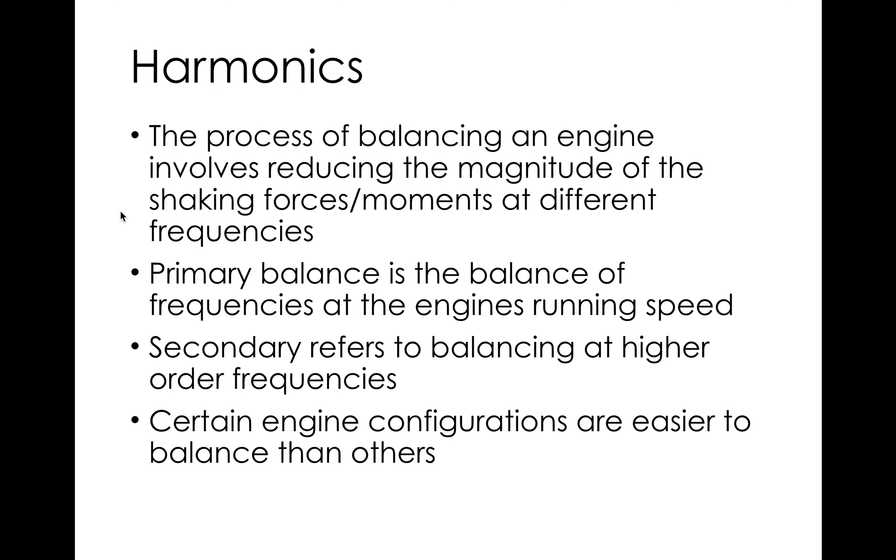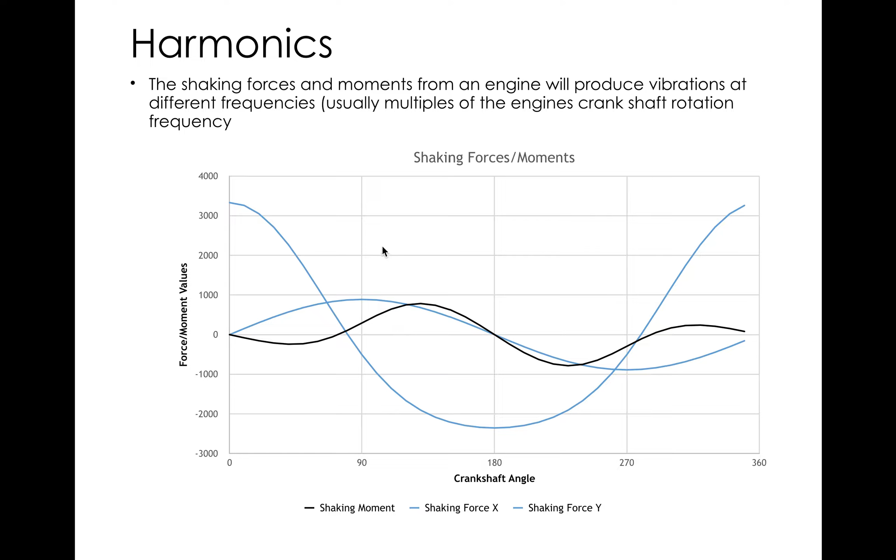Shaking forces, something we talked about previously, can be analyzed using the model we made for the internal combustion crank slider mechanism and force analysis to plot the XY force and the shaking moment. Last time we did the simplified model looking just at the acceleration of the piston. Here we're looking at the forces on the engine block and the moment on the engine block, and these are the forces that actually cause the shaking. We can do a fast Fourier transform to get the frequency domain information.

That's from the piston: as it moves up, it's pushing the engine down; as it moves down, it's pulling the engine up. It's a really strong vibration in the X direction at the frequency the crank is running at.

The Y shaking force comes from the connecting rod moving back and forth. Again, it's very strong at the primary, but not nearly as strong as the X, because you're slinging a lot of mass with the piston moving up and down, or in this case left and right. We modeled that left to right in the X direction, but you could rotate the graph to make that axis up and down. In the direction the piston's moving is where most of the mass is being slung around, so that's where most of your shaking force is.

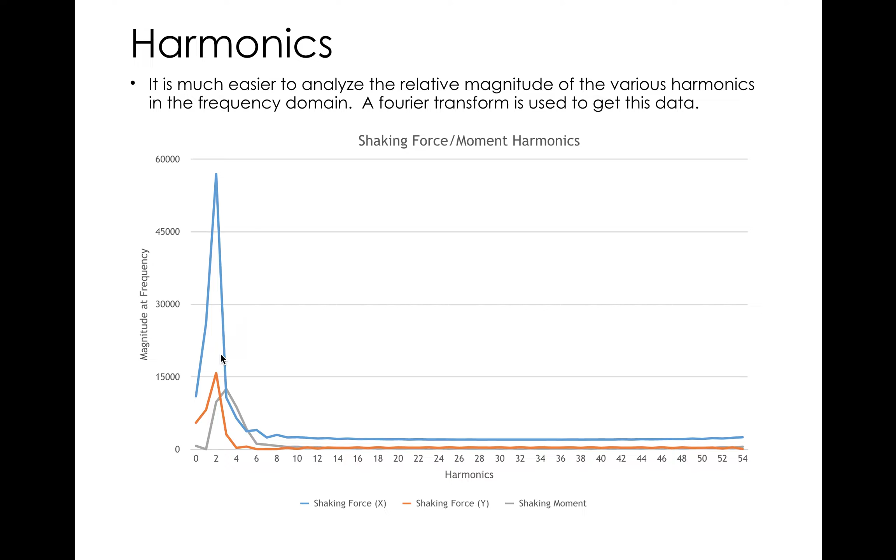What we did last time, just looking at the X shaking force and the first and second harmonics, is not bad - primary and secondary. We could go ahead and take what we've covered in this class to model all these higher order harmonics, but in general we pretty well only care about the primary and secondary: engine speed and twice engine speed.

Talking about specific kinds of engines, the single cylinder engine, the simplest kind, is hard to balance. The biggest problem is you've got a piston going up and down, and you don't have anything that counters that, so the engine wants to hop. When the piston goes down, the engine wants to hop up. When the piston's going up, it pushes the engine down. So the engine wants to hop up and down in the opposite direction of the piston motion at any given time, and there's a huge component of X shaking force in a single cylinder engine that the only way to fix is to put a mass on the other side moving in the opposite direction of the piston.

When you've done that, you've made a two-cylinder engine, or a really poorly designed single-cylinder engine with a big eccentric weight. If you're going to go through all the trouble to put a mass that's moving in the opposite direction of the piston, you might as well make it a cylinder too and make a two-cylinder engine.

So with singles, there's not a lot you can do. The crank, you can put an eccentric weight on it that rotates down as the piston goes up. That helps a lot to have a counterbalanced crank, but still there's only so far you can go with that. A static balance of the crankshaft and part of the connecting rod mass helps.

Secondary, there's nothing you can do. Well, you can. The big issue on secondary is the connecting rod moving left and right, and the Y force from that. You can make it so that the crank counterweight is on the right side when the connecting rod's on the left side, and that can help a little bit with the Y shaking force. So you can help with some counterbalancing on the crank, but it's really hard to get perfect secondary.

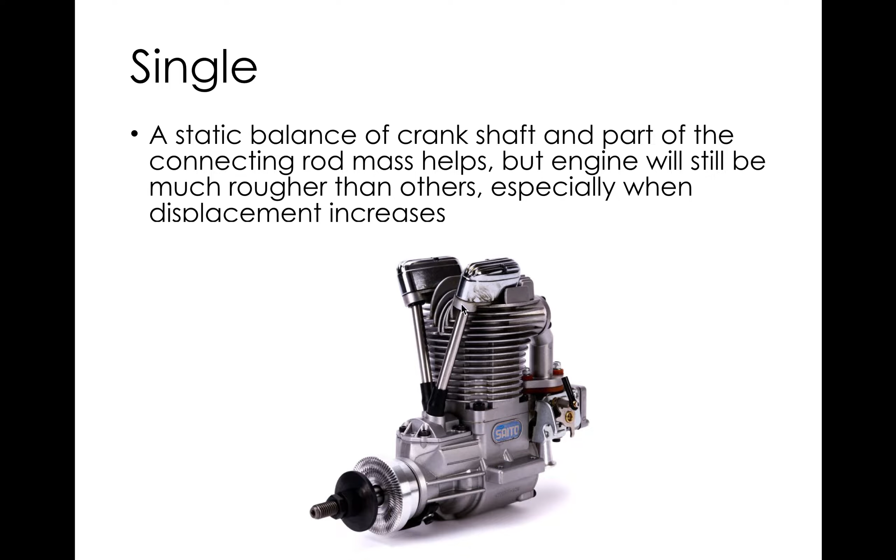In things like motorcycles and ATVs and side-by-sides, you just don't care that much about the shaking—they just shake, it's part of it. You wouldn't put this in a car for a lot of reasons, but it would be a very unpleasant experience to have a really big displacement single-cylinder engine running at high speed. It would be very harsh to drive. So you just have to live with the shaking forces on singles.

Inline engines, when you start stacking up cylinders in a line, for even firing order versus odd—even means the cylinders fire with an even number of the same degrees between them. So an inline 2, 4-stroke engine would have a cylinder fire every 360 degrees if it was even fire. An inline 4 even fire would have a cylinder fire every 180 degrees of crankshaft revolution. 180 times 4 gets you the 720 degrees for a cycle.

A V8 would have a cylinder firing every 90 degrees. An inline 8, even fire, would also be every 90 degrees. A V10 for even fire would be 72 degrees, but V10s start to get a little weird, and you might not be able to achieve it, because the crank throws—where the connecting rod mounts—need to be in the right position so the cylinder's at top dead center when it fires. So there are only certain geometries that work, and for some things like V10s there aren't a lot of good options. You can make an even fire V10, but it's fairly sophisticated—I think you need a 72-degree bank angle on that, but I can't remember off the top of my head.

There are some engines where it just makes sense to do odd fire, with different timing between exhaust pulses. So for a 2-cylinder engine that's odd fire, you might have maybe 540 degrees between two cylinders firing, and then whatever 720 minus 540 is—280 or whatever, that's not right, I can't do math in my head right now. Anyway, you might have a different angle between the firing of cylinders, and that's what an odd fire engine is.

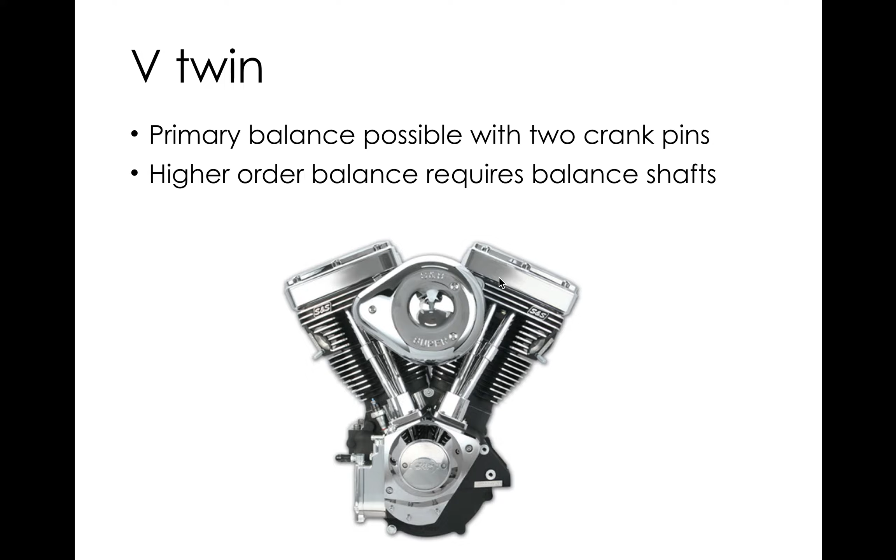V4 I don't have in here, it's pretty rare. There's not really good advantages on it. It's basically straight twos, which we've already talked about, an inline two is not going to have primary or secondary balance, so it has almost no good features from a vibrational standpoint. And just slapping two together to make a V4 doesn't make it that much better, you just kind of have two of them offset by whatever your bank angle is. So the package is kind of nice because it's somewhat square as a V4, but not common.

The weird things like V5s, yeah, you can do, but that doesn't mean it's a good idea. There's been some weird stuff like that in the past.

So you put two of these things together, an inline three on a bank angle, and that doesn't mean you magically solve these primary and secondary problems. So the issue with the V6 is it's going to be better than an inline three would be, but it's still not great from a primary or secondary moment perspective.

You really need large balancing weights on the crankshaft, two large counterweights, to get the primary moment, or a balance shaft to get the secondary, or both. So it depends on how big these things get, and that's a limiting factor on V6s. V6s don't get very big in displacement. Once you push past 3 or 4 liters, this vibrational thing becomes more of an issue, and you don't really see them. There's some weird applications for bigger V6s, but it's rare to see a big V6 nowadays. There's just not a lot of real reason to do it. But for 3 to 4 liters, the vibrational characteristics are manageable.

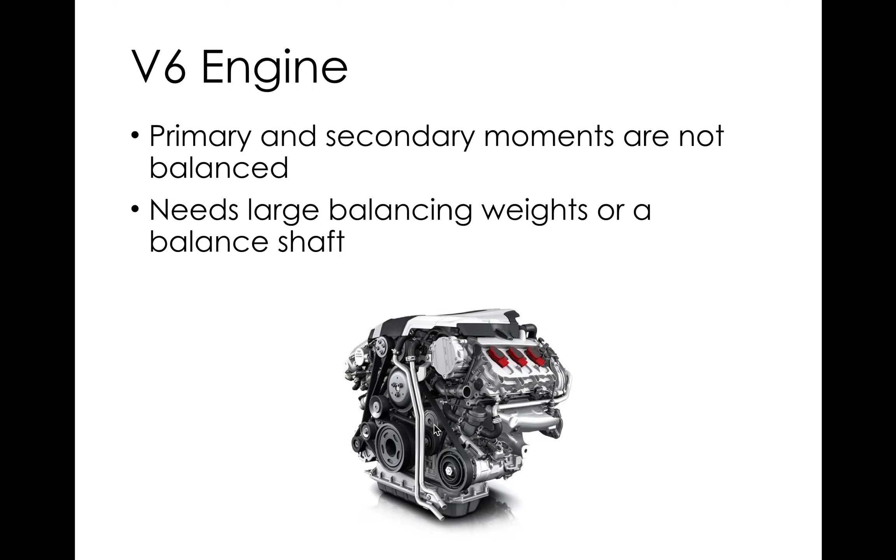So there's some really good V6 engines out there. Nissan makes the VQ engines. VQ, I think they're VQ. I get my VQs and VKs mixed up. VK is the V8. VQ, I believe, is the V6. And they put it in all sorts of stuff. There's other really good V6s out there. It's not a bad engine, but it is a compromise design.

Cross-plane V8. There's two good ways of doing a V8: cross-plane and flat plane. Cross-plane, if you look down the axis of the crank, the crank throws are rotated at 90 degrees, so looking down, this will look like a cross. There's 4 pins, each pin has 2 connecting rods. You need a 90-degree bank angle for this to work, otherwise you'll end up with an odd fire engine. With 90-degree pin offsets, you'll only have an unbalanced primary moment, which you can solve with counterweights. So you'll see these two eccentric weight systems, two big heavy counterweights offset 180 degrees.

That solves the primary moment. Secondary balance you'll have very easily, just with some counterweights and a heavy crank. But with a heavy crank you solve your moment problem, and you've got an engine with very good balance characteristics, so you don't have to worry about balance shafts. You can make these things as big as you like. I mean, they do make these things big, in automotive applications they make 7-liter V8s. They used to make even bigger than that. In racing you can get 8-liter, 9-liter, 10-liter V8s. They scale up, and they can run at high RPM.

A big 426 Hemi can run 7,000 RPM. A big block Chevy can run 8,000 RPM. But they're good engines. From a balancing perspective, the only compromise is you need a bit of a heavy crankshaft, and that might limit how fast the engine's angular velocity can change, so it might make it a little sluggish when changing RPM, like when shifting, or in a racing application where you want every last bit of acceleration, and you don't want to be spending a lot of engine power accelerating your crank mass. Maybe there's some benefit in having a lighter crankshaft. But from a balancing perspective, and a sound perspective as we'll talk about later, it's really good.

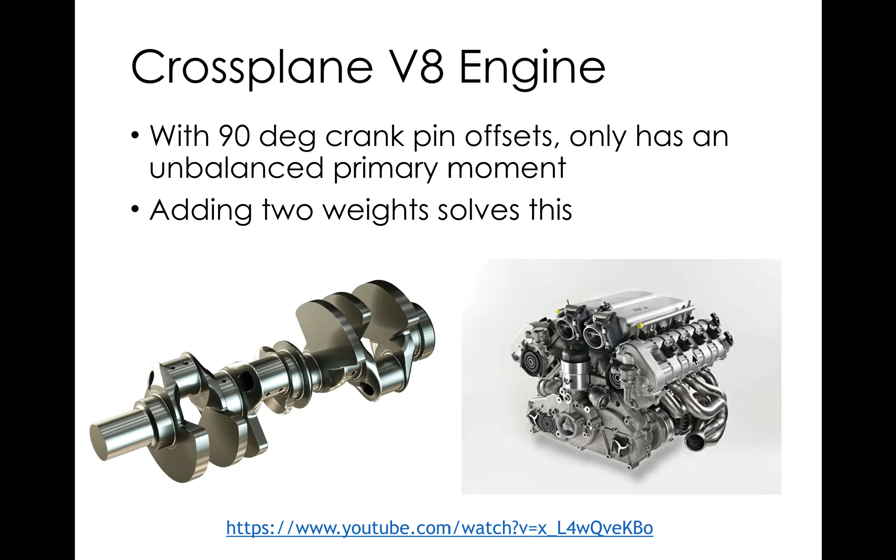As far as making more power, the main advantage of a flat plane is in exhaust tuning, which we'll cover more when we get to sound. In a cross-plane V8, you always have two cylinders on a bank firing sequentially, like bang bang bang bang bang bang bang bang. So getting the left and right bank exhaust pulses merged for proper scavenging is more of an issue, whereas in a flat plane it's bang, bang, bang, bang, bang, bang, bang, bang evenly. So it's really easy to design exhaust manifolds for a flat plane, and maybe you get a little better scavenging. They sound a bit different too, depending on how the left and right banks are merged, and that's one real performance advantage the flat plane has.

From a mechanical perspective, there's really no power advantage other than maybe the crankshaft revving a little freer. Honestly, if you do things right, it's mainly sound that's the difference, and even then you can make it so the sound's not an issue. So there's not as much of a difference as people are led to believe by the hype around flat plane engines, but there are things you can do to make them sound different and really cool, and there's some truth to them revving a little freer and higher.

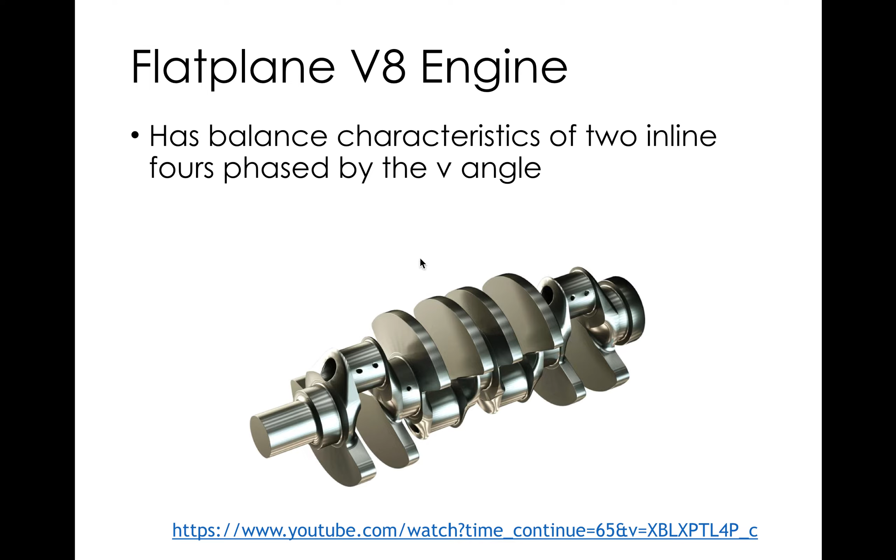But a lot of it's hype. There are a couple things though: these can rev a little more freely, and without doing a lot of tricks on the exhaust, they sound really kind of cool and unique. We'll talk more about that when we get to sound.

A V10 is going to be two 5-cylinders stuck together at a bank angle, so 5 divided by 2. We've got primary balance, and we're starting to get somewhat closer to secondary balance, but it's not secondary balance. If we had a V12, that's 6 divided by 2, we'd have primary and secondary balance, which is great. So we're not quite there on a V10, meaning you're going to have a secondary problem, which means you need a balance shaft or you need to limit the size of the engine.

There are two different designs: one where each cylinder has its own pin on the crankshaft, and some where they're shared, with 5 throws on the crankshaft for 10 connecting rods. Those shared-pin applications get odd fire, and these things will sound bad. The V10 Dodge put in the Viper for a long time, and in some pickup trucks, doesn't sound very good compared to some other V10 designs.

Split pin V10s sound really pretty cool. The F1 V10s sound pretty cool too. The odd fire V10s have a very interesting harmonic that can sound really, really neat, like the old F1 engines. So V10s have a reputation for sounding cool, and a lot of it's just lots of cylinders, meaning more bangs per minute, and more bangs per minute sounds cooler.

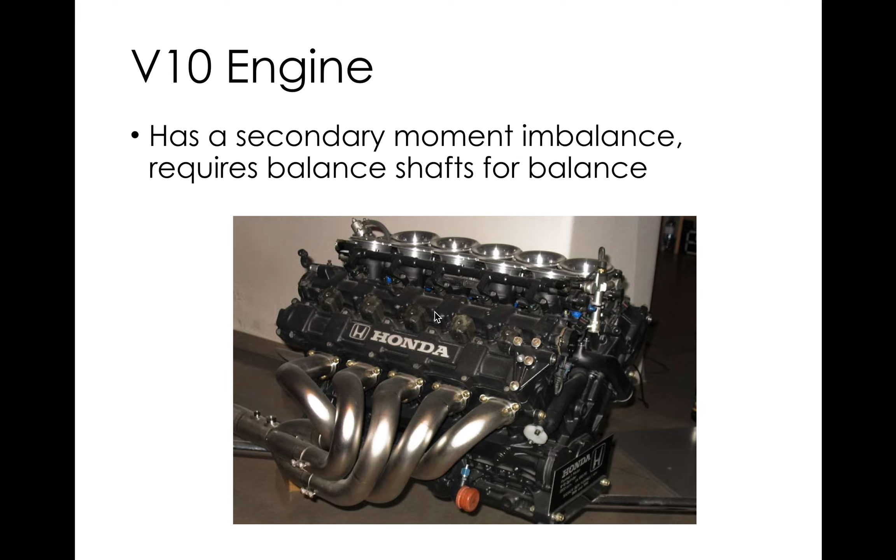But again, with some odd fire designs you can get interesting harmonics, or with how you're merging pulses from the left and right bank on an even fire engine, you can get interesting harmonics, and that's a lot of what makes an engine sound good. There are two things that make engines sound good: how many bangs there are per minute, and past that, interesting harmonics. V10s can have interesting harmonics, in a good way and in a bad way, depending on how the exhaust is set up and how the crank's designed.

V12s, that's 2 straight 6s in 2 different banks stuck together on a common crankshaft, so it's going to be better than a straight 6. Straight 6 is pretty good, so a V12 is going to be really good.

Downside of a V12 is you've got 4 more cylinders, so your part count goes up, complexity goes up, cost goes up. The engine starts to get really long, and you're limited in what you can package it in. So you see V12s in some extremely high-end street cars, like Lamborghini makes a V12, BMW made some V12s, Mercedes made some V12s.

But outside of that, it's super high-end luxury cars and super high-end performance cars and some race cars. And then big diesel engines like train engines will be V12s or V24s or something like that. But balance-wise, they're fantastic. They just start to get a little complicated and expensive.

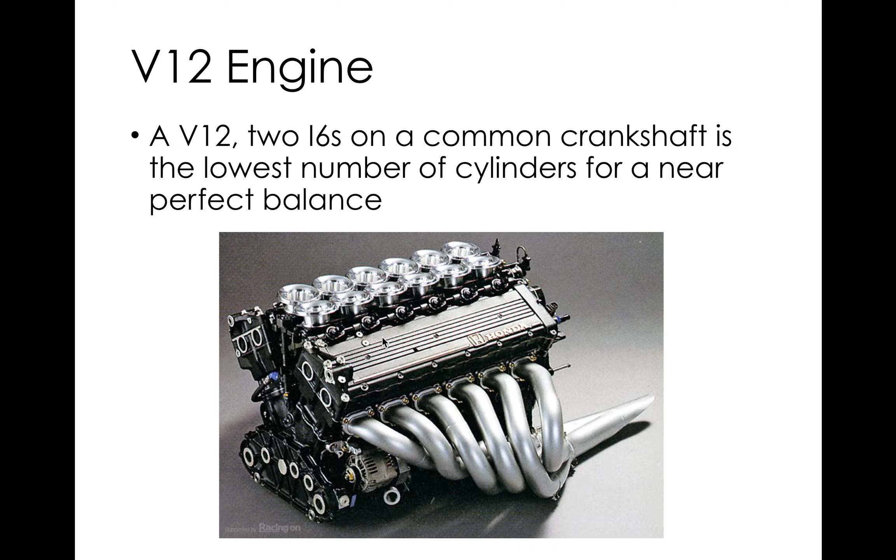So sound. Again, I wish I could show the videos. This is sort of a compromised way of delivering this lecture compared to the way I normally do it in class. So I highly recommend pausing and opening these videos in a new tab and listening to them.

So the single cylinder noise, the only thing you get is bangs per minute. That's the only thing you can really change, past tuning of the exhaust pipes and any resonators or mufflers. And I don't want to talk about that - that's a musical problem, a musical instrument problem. It's the design of the exhaust pipes and mufflers. That's not anything to do with why one engine sounds different than another from a mechanics perspective. That's musical instrument tuning, so I'm not going to talk about that at all. I don't know much about it, other than some very basic stuff.

But as far as engine mechanics go, what you can do in a single to change its sound is spin it faster, or go 2-stroke versus 4-stroke. In general, the more bangs per minute you have, the better something sounds. An engine at 7,200 RPM sounds better than an engine at 3,600 RPM. It's louder and it's a higher frequency, and it just perceptually sounds better.

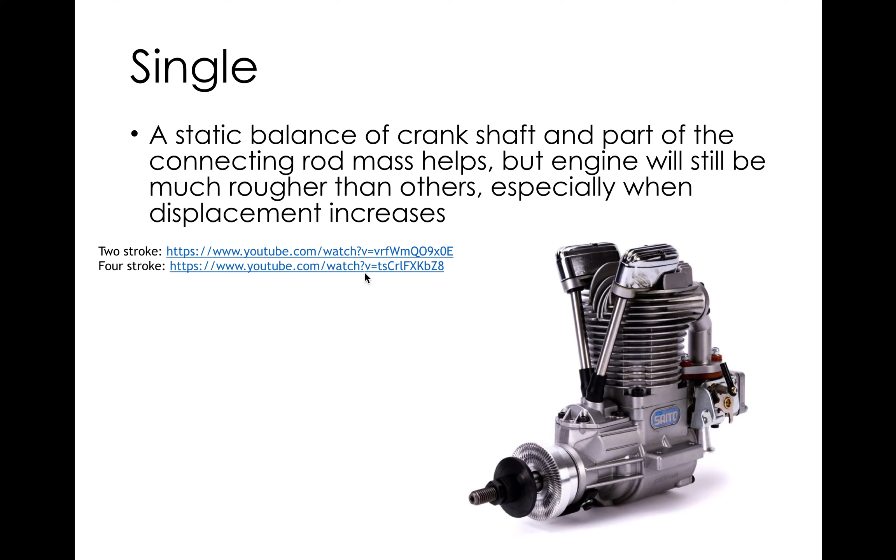Again, anything past that is tuning of the exhaust pipe, not anything to do with the geometry of the engine. Inline engines, a lot of them are going to be even fire, except some of the weird 3 and 5 cylinders. So even fire engines, like an inline 4 even fire engine, it's going to be a bang every 180 degrees.

And so there's not any interesting characteristics to an inline 4. All 4 cylinders are going to get merged into one pipe, one bank that goes into one exhaust pipe in most applications. And really the only thing you can do with an inline 4 to make it sound interesting is spin it at higher RPM - usually the higher RPM, the better things sound. So 4-cylinder motorcycle engines that rev over 12 or 13,000 RPM sound pretty cool, but that's just because of the RPMs. There's not any real interesting characteristics to an inline 4.

A boxer 4, which is a flat 4, is two inline 2 engines phased 180 degrees apart, where the pistons go towards each other and away from each other. That's what a boxer engine is, and you can find animated GIFs of this online. It's still going to be even fire - you're still going to get a pulse every 180 degrees. What's different in a boxer is you've got 2 banks, and with 2 banks, you can change how those 2 banks get merged together and get some interesting sound.

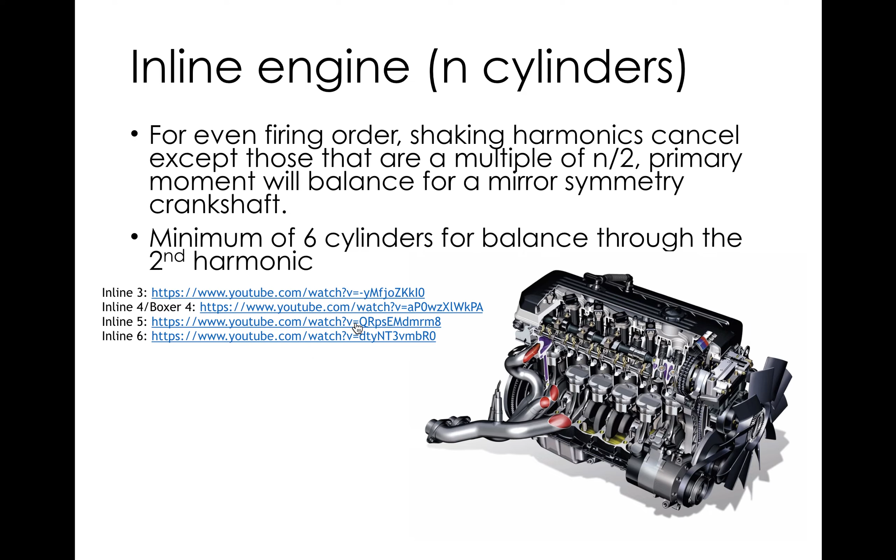V engines, V12, V twins. If you have an odd fire, you're going to get some interesting harmonics from that, but the bangs per minute aren't there. So that's the Harley sound. It's low bangs per minute, but very interesting, odd fire. Kind of the timing on it.

V4s, again, weird engines, you're not going to see that many of those. V6s don't sound very good in general. You can make a V6 sound good, some companies have done some really good things making V6s sound good, but V6 engines just don't have a reputation for sounding good. The problem is you've got 2 banks here, and it's a lot about how those are merged. Some companies do a better job of merging those banks together, and some do a worse job.

Probably the best thing to do would be to have 2 separate headers and keep the pipes separate, and then a little bit of a crossover from scavenging, and try to keep it sounding like 2 inline 3s. That's probably about the best you can do with a V6. If you just merge all 6 of these things together with equal length tubes, it's going to sound pretty much like an inline 6, but the packaging on doing that is a nightmare.

So what you normally see on these is a pretty simple header. These are usually used in somewhat economy cars, so you'll see 3 go together, and just a real short tube header, or not even a header, just a simple exhaust manifold, and then those kind of stuck together. You don't get good merging of the pulses, and they just don't sound good in most applications. You don't get the bangs per minute of the higher cylinder counts, and you don't get any kind of interesting harmonics. And if you do a bad job of it, I don't know.